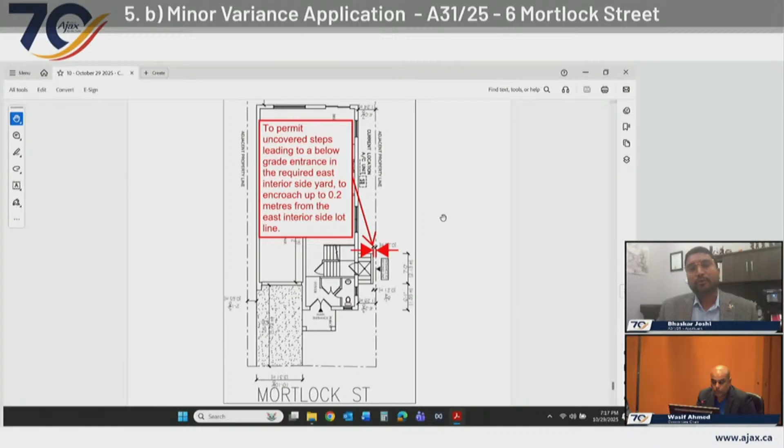The current condition of the basement is unfinished, and after getting these minor variances, we will be ready to put the permit for the rental apartment. That will create a new rental apartment in the basement.

Thank you. Okay, perfect. Before I look to committee to see if there's any questions for Mr. Joshi, can I just confirm with town staff whether notice was served on this application and whether any correspondence was received? Mr. Chair, notice was served and no correspondence was received.

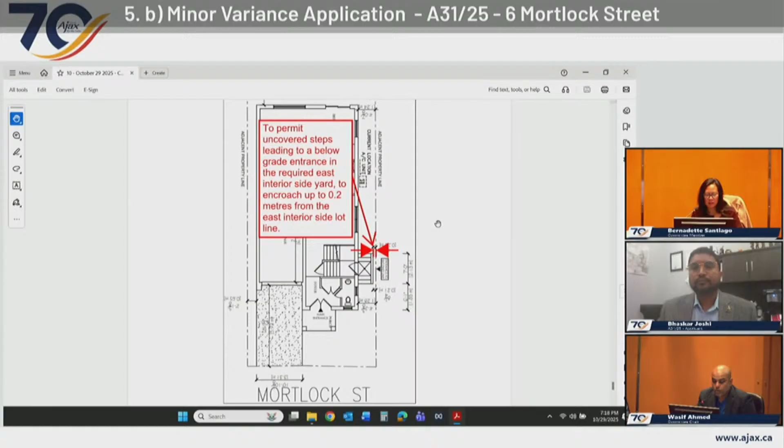Bernadette, through you Mr. Chair, perhaps I can hear from the applicant how you will ensure proper storm water drainage around the below grade entrance to prevent pooling and water infiltration, considering you're quite close to your neighbor, and just want to make sure that's taken into account as you work your plans out.

Sure, through chair, I can answer that. There is a 0.2 meter setback still there. However, this new below grade entrance will be 6 inches higher than the grading, which will stop the water from going inside the below grade entrance, and the water can drain on the side of the below grade entrance.

Okay, you're okay Bert? Ken? Through you, Mr. Chair, is it intended that there will be a light above the door at the side entrance, and is there a plan for snow removal?

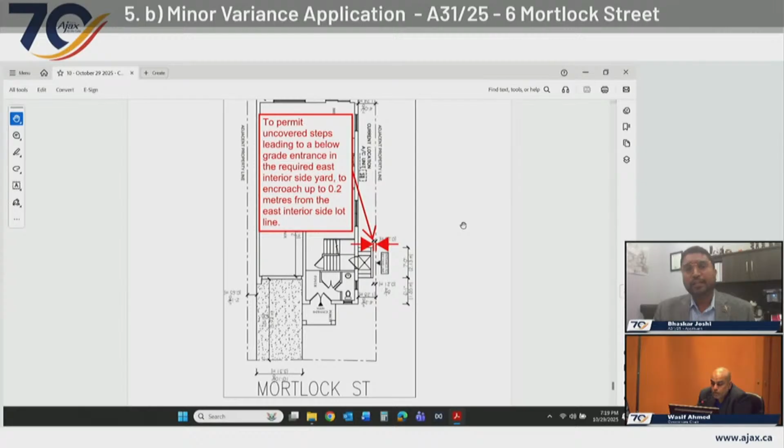Yes, as per the building code requirement, when we propose a new side door, it has to have a new light, which could be turned on and off by a light switch or sensor, but it has to have a light when there's a new side door proposed. For snow removal, it will be the same as a homeowner removing snow on a side yard, because it's accessible on both sides, and it's only 3 steps down.

Okay. Ken, you had a follow-up? I did, through you Mr. Chair. Will the light have some kind of reflector on it so that it does not cast a shadow on the neighbor's property, which has windows in the side yard?

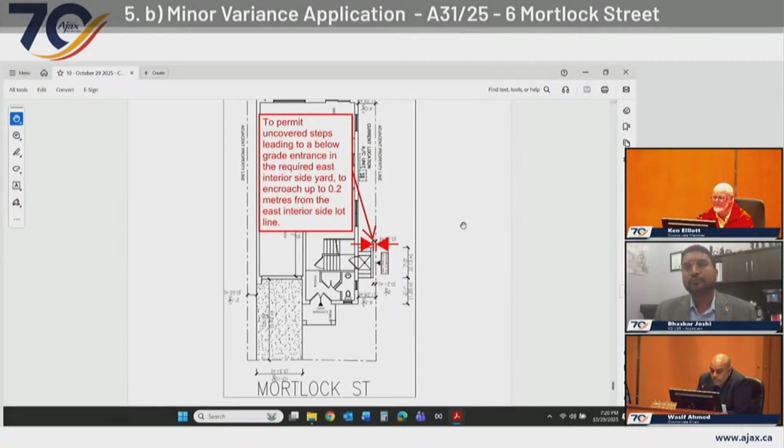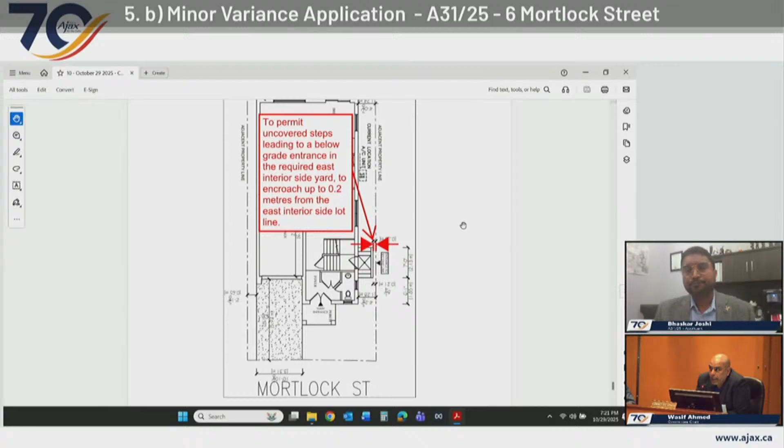If you put a note, then we can enhance this requirement. Generally, building code doesn't require it, but if we put a note, then we will make sure we put a light that only shines down, not to the side. Yeah, that's exactly what we're looking for, Mr. Joshi. If you could take that note yourself and pass it along to the owner, that light should have some mechanism for it to point downward, as the neighboring property does have a window there on the side. Sure, I can put that note also on the drawing when I prepare for the building permit.

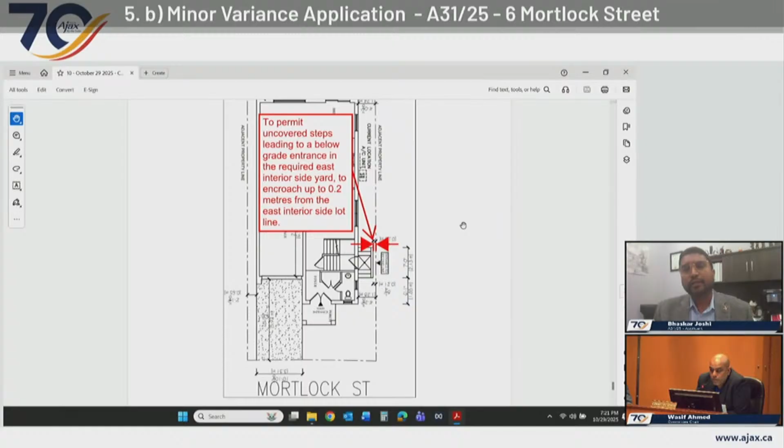Great idea, thank you. Any other questions from committee? Bernadette? Just one more, through you Mr. Chair. Could the agent confirm that the pedestrian pathways to and from the steps in the rear yard will remain unobstructed by landscaping or whatever it may be? I understand that utilities will need to be moved. I just want to make sure there's easy access to and from the rear yard.

Yes, as per my knowledge, there is no utility attached in this area which needs to be removed, and we are okay with that. No utility coming through this area is on the other side, and let me understand if I have your question correctly. Going through and coming back, as there are only 3 steps, it's easily accessible. Or can you repeat your question so I can explain it better?

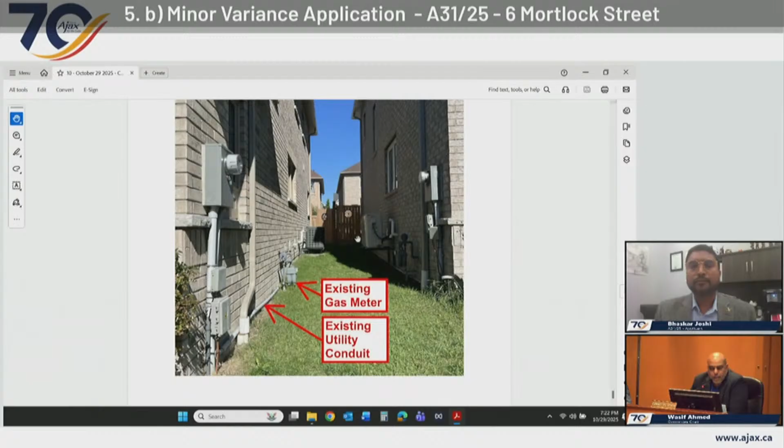Yeah, if I may, town staff, can you just put figure 3 up, next page? So, Mr. Joshi, if you can see the screen share, this is where committee member Santiago is talking about the access, right? These were also read at the beginning of the application portion. There is a condition formally in the report asking for these to be moved.

Okay, sorry, I mixed up 2 properties. So the homeowner knows about it and is ready and willing to move this gas utility on the front side, onto the other side, the west side. And to my colleague's question, it is also a condition, I think condition number 3, that there will be a pedestrian path accessible all the way to the backyard. Yes, that will be, yes, because that's why we're making steps on both sides, going down and then bringing it up to the backyard.

Okay, all right. Any other questions from committee members?

All right, thank you, Mr. Joshi. I'd now like to check to see whether there's anybody here to speak either for or against this application. We're again on application A3125 for 6 Mortlock Street. Anybody in person? Anybody online? No? All right.

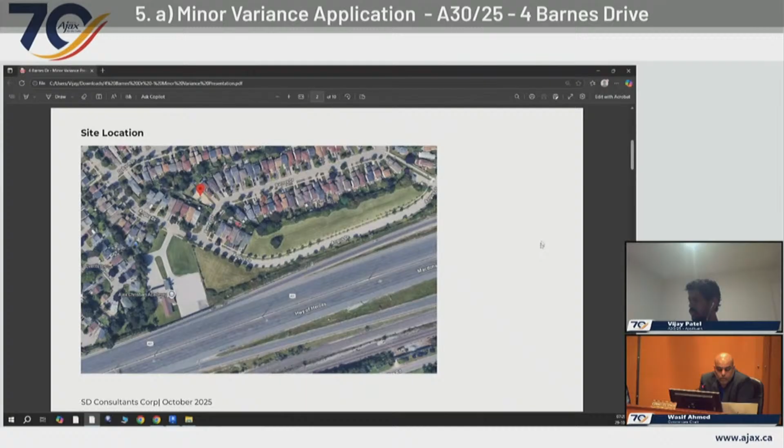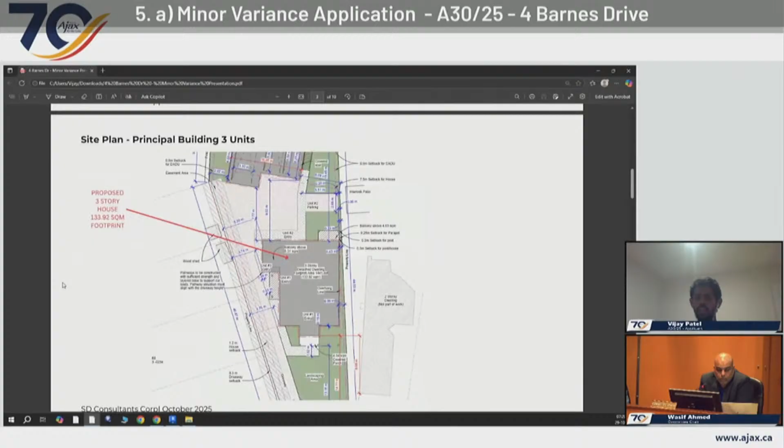This plan shows the proposed building, a 3-story house with 3 residential units. The footprint measures around 134 square meters. As we prepared the layouts, our aim was to create homes large enough for families compared to small apartment style units.

In addition, we proposed an accessory dwelling unit above the 3-car garage, providing 1 additional unit. This ADU has a 77 square meter footprint. In total, the property will accommodate 4 units. Each unit is designed as a 2 or 3 bedroom home, and each unit has its own parking space.

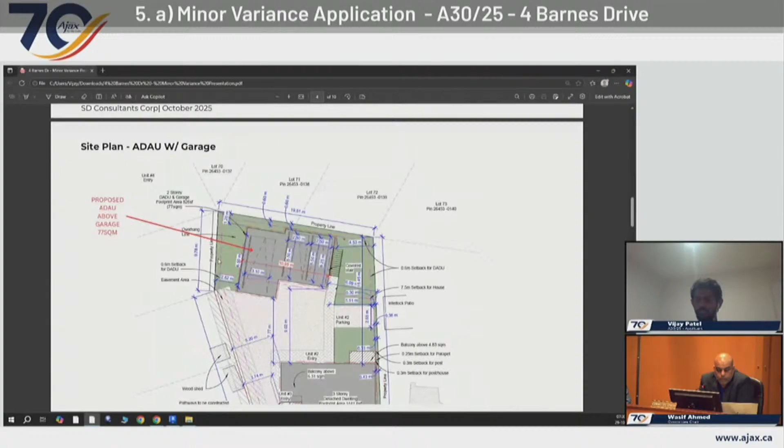This elevation shows the secondary structure on the ground floor. We are providing 3 parking spots for cars, and on the first floor we have planned unit 4. This creates efficient use of space while minimizing the building footprint.

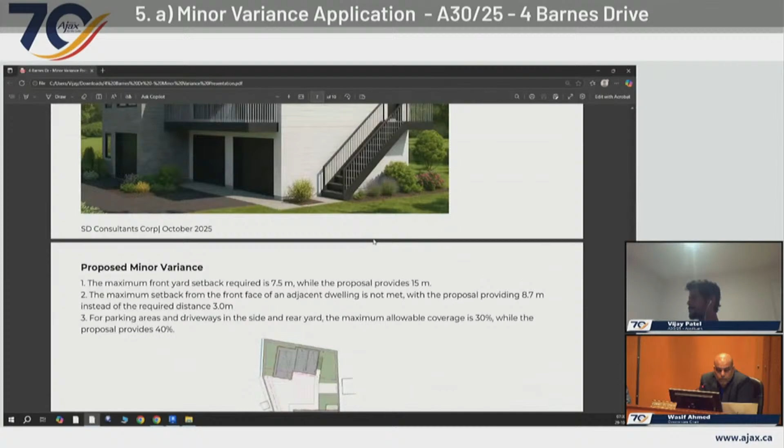Can you just go up, sorry, Mr. Patel? Yeah, can you just go up one more slide? Yeah, up one more, just wanted to see the full building as well.

Just before you go on, so just to confirm, the building itself plus the garage with the unit above it will all be a flat roof, correct? That's what I'm seeing in the pictures. Yes. Okay, all right, thank you. Please continue.

Yeah, so we are seeking approval for the following variances. Front yard setback required is 7.5 meters and we are proposing 15 meters. Second, setback from the adjacent dwelling required is 3 meters and we are proposing 8.7 meters. Third, parking area or driveway coverage allowed is 30% and we are proposing 40%.

These adjustments result from the unique lot configuration rather than overdevelopment. To help visualize this, I have included the lot plan to demonstrate how the lot shape has influenced these variances. The site is a pie-shaped lot with a narrow frontage, creating a challenge in meeting all setback requirements while still providing sufficient driveway width.

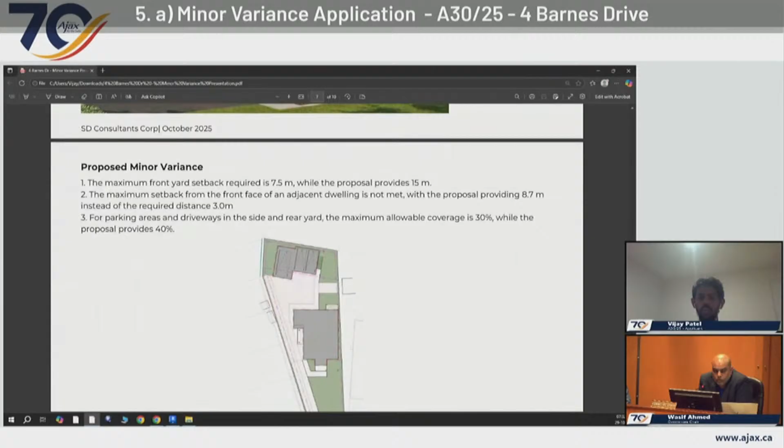Because the house is pushed further back, the rear yard landscaping area is reduced. However, overall the property still provides good green space.

We are also requesting approval for the following variances. Garage width allowed is 3.3 meters and we are proposing 11 meters. Garage or ADU area allowed is 60 square meters and we are proposing 83 square meters. Parking space dimensions required are 2.5 by 6.5 meters and we are providing 2.5 by 5.5 meters.

The intent of the wider garage is to provide covered parking space for 3 cars. If we were to place the ADU at grade, it would consume more lot space and reduce the available green space. By building the ADU above the garage, we minimize the footprint impact and preserve the landscaping.

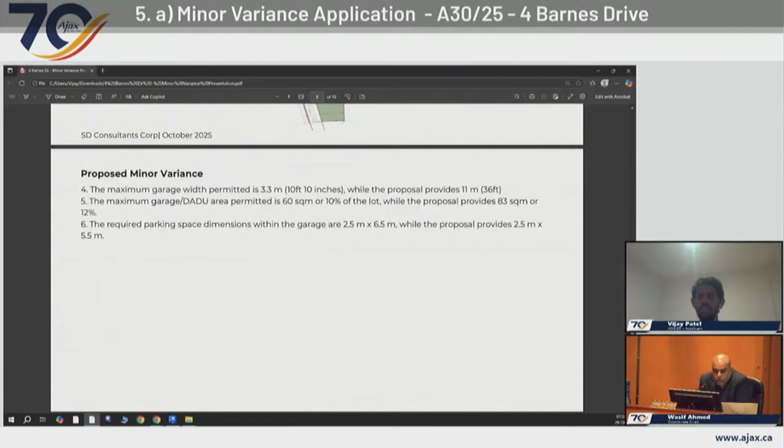Regarding garage width, the zoning allows only 10 feet, which is wide enough for only a single car, making it impracticable to meet in this case. For parking stall length, although we propose 5.5 meters instead of 6.5 meters, this still accommodates standard vehicle safety and efficiency.

We would like to address neighbors' concerns. First is privacy. We understand the concern about privacy. Our design does not add any new windows on the side facing the neighbor. The balcony is similar in impact to the existing 2-story homes in the neighborhood, which already have backyard windows.

Another issue is drainage. Drainage is a valid concern, and we will be submitting engineering drawings to the city to confirm that all water is managed on the property on site and will not run off onto the neighbor's property.

Third is parking. We have heard the concern about street parking. Our proposal provides the required number of parking spaces for each unit as per the zoning bylaw, so no additional pressure will be placed on the street parking.

Last is noise and construction. Construction can be very disruptive, and we recognize that our client will follow all the city's regulations for construction timing and noise, taking steps to minimize the impact on neighbors. In addition, the client is planning to use modular, factory-assembled building. This approach not only reduces the duration of on-site construction but also significantly lowers the impact on surrounding neighborhoods by minimizing noise and shortening the timeline.

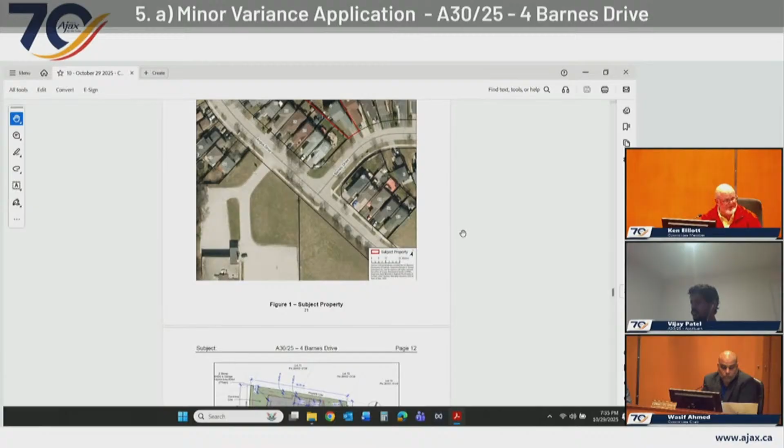Through you, Mr. Chair, I wonder if they could put up Figure 2 site plan. Yeah, make it a little bigger. I guess we're sharing his screen, right? No, this is our screen. Okay, yeah, can we zoom in near the top?

So for the main building on the left side, it looks like there is a label that says Unit 1 entry, and it's to the south, and then there's Unit 1 entry to the left. Is that actually a balcony? I see the balcony for Unit 2, but is that where the balcony is for Unit 3? And is there a second entrance? Just looking for the label.

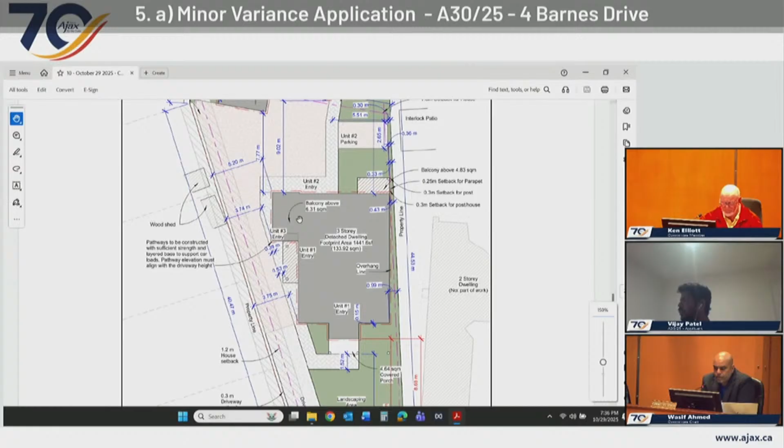So Unit 2 has two balconies, one on the left side and one on the rear side. Unit 3 has one balcony on the rear side only. Through the chair, Ken, the balcony you've asked about is where my cursor is pointing to right now. Okay, yeah, thank you.

Any other questions from the committee? Amanda?

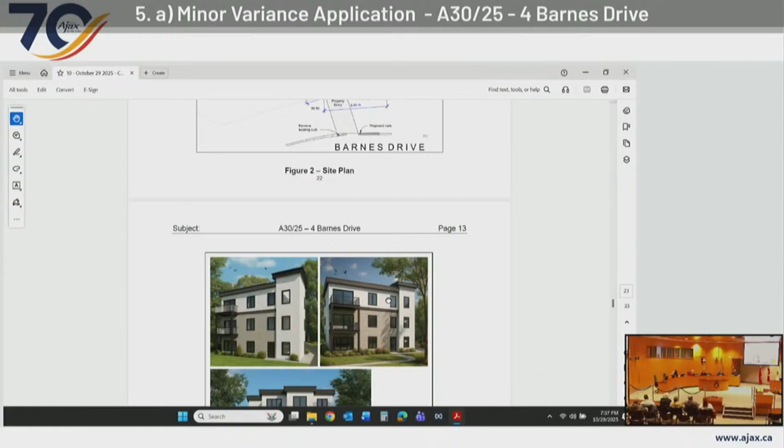The garage in the rear has 3 parking spaces within it. Will they be fully enclosed individually per parking space within the garage, or would they be open within the garage? So we would like to keep it open because it's easy to open the doors, and also if we separate them we have to provide fire ratings between each parking spot, which reduces more space due to wall thickness and stuff. So we'd like to keep that open.

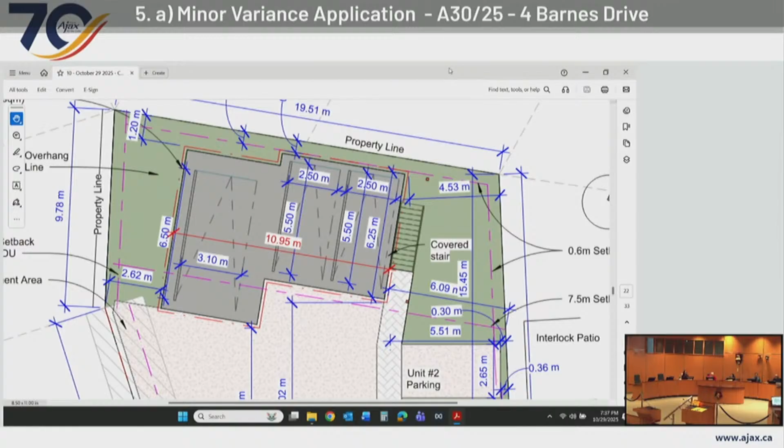Okay, any other questions from committee?

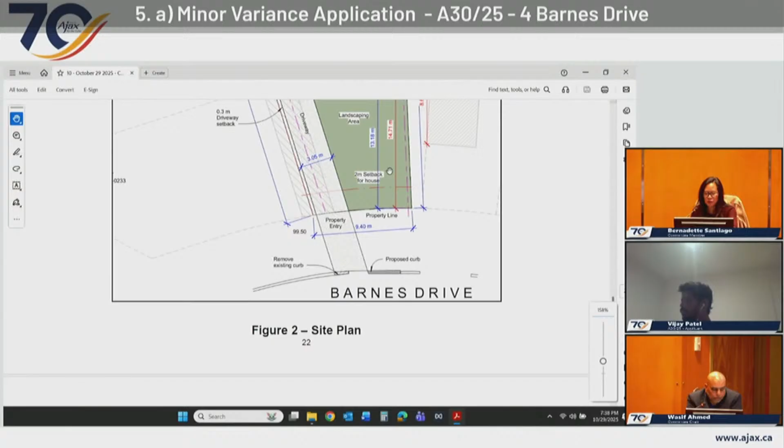Through you, Mr. Chair, perhaps the applicants can speak to what, if any, architectural treatments or designs are being contemplated for the accessory building, to ensure there's a level of compatibility with the principal triplex as well as the surrounding neighborhood. I can appreciate that this structure, as noted in the diagrams in our package, looks very different from your neighbors. I'd like to hear from the applicant what considerations are being made for the respectfulness of the neighborhood and in keeping with those that surround this particular property.

Yeah, definitely we considered that when we started, and we saw that all the buildings around are 2-story. To provide a 3-story building, we have to use a flat roof; otherwise we would love to use a gable roof, but then we can't meet the overall height restriction. That's for the house. For the garage dwelling, we are almost meeting all the zoning bylaws — there's 3 or 4 zoning bylaws we are not meeting, basically due to the pie shape lot. We are also using natural stone veneer up to eye level and separating the 3rd floor so it doesn't look like a huge building from the street.

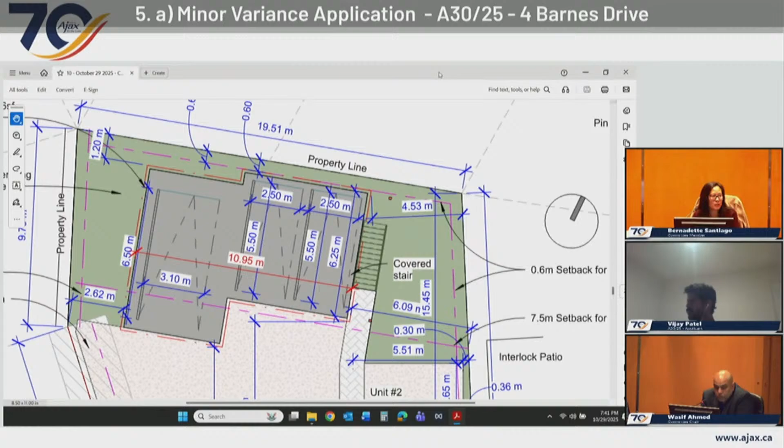And so if we could speak to the separate entrance, the parking allocation, which I know is noted in the report, as well as the waste collection. You could appreciate there could be X amount of people living on top of that garage. When you populate an area, people are going to be using the facilities, such as they will have visitors, they will have X amount of garbage, et cetera. I'd like to hear from the applicant if he could speak to that.

For the garbage, I feel that we have sufficient extra space on the garage, so we can provide some space for the garbage. And for the temporary parking, they can definitely park on the driveway, or they can use public transportation. But that's our plan, and every unit has its own parking, so hopefully that's not a problem.

Yeah, so we will make sure during the building permit application we provide the engineering drawings for the grading. And if required, we can provide a small retaining wall between our property line and the neighbor's property line. So it's definitely going to conform to that before the building permit is issued, basically.

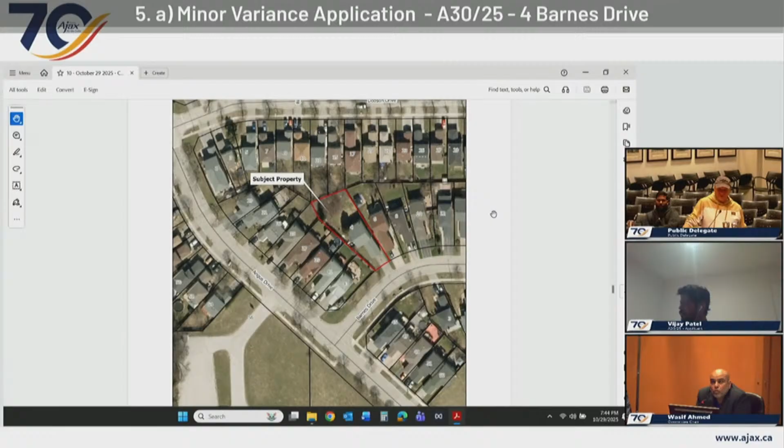And I'll start with your name. Wayne Fulcher. Okay, and I'm one of the neighbors adjacent to that property. I've been a resident of this subdivision since it was built, which was 30 years ago. It's a single-family subdivision. Most of the lots are 35 by 100-foot lots.

So it's surprising to me that we're sitting here in council looking at a fourplex going in on a single-family lot. Having said that, I understand there is, I guess, room for some because it is a fairly large lot, but the applicant has made this so that four family dwellings are on a single lot in our neighborhood.

So my biggest concern, I guess, is how this even got approved, first of all, but after that, the biggest concern is even parking. We're looking at a regular-sized lot in a small subdivision here. Most people have at least one car, quite often families have two. Never mind snow removal, four cars - I'm not even sure about the garage size, because it must be fairly small. I don't even think somebody would have a pickup truck that could get into that garage.

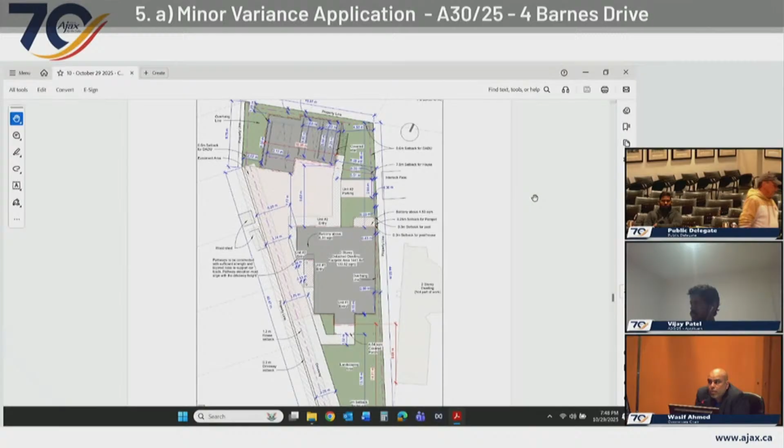Okay, maybe I'll, if it's okay with the committee, I'll touch on a couple of points, Wayne. One was in terms of parking. So there are, to your point, and as we all saw from the drawings, there are 4 units, there are 4 parking spots. So there's 3 in the covered and 1 in the open to the far right that you see, that's shaded near the middle of the property. That is the town's bylaw.

The other thing, one of the things that we as committee members, and keep me honest here, guys, is we see applications all the time for condos, for building residences, whether it be low-rise, whatever, and they will normally allocate only 1 parking spot to an apartment which has square footage of nearly 900 to 1,000 square feet.

I hear you in terms of your comment. I'm in the same boat as you were suggesting. Say I have a single dwelling house near Westney and Rossland, and I have 2 cars. So if I was buying or interested in buying a property or moving into this property as a renter or buyer, whatever the case may be, I personally would kind of not consider this one. I would scratch this off my list. So normally, and I know you made the comment about the pickup truck, if I had a pickup truck, I probably wouldn't be going in here.

Right, so normally people will, and this has been a conversation that we've had as committee members with condo developers as well, to say, well, you're only going to allocate 1 parking spot, but that's what the bylaw says, that it needs 1 parking spot per dwelling. In terms of if I was going to have a ton of visitors, my visitors can't, and if they're going to stay overnight, they can't park on the street.

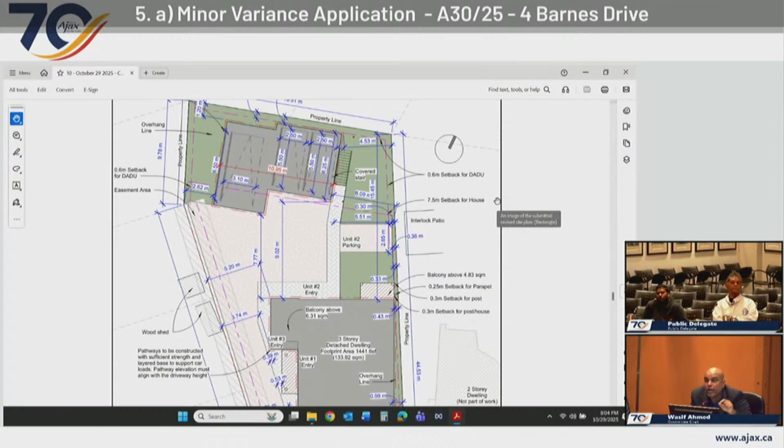But it was the same scenario, right? There was new construction happening, and it was kicking stuff onto my property. But there's nobody for me to go knock on their door and say, hey, you're going to have to pay for my car washes for the next 6 months while you're doing this. It's just not going to happen.

Did you laugh when you saw that comment? I smirked, yeah, I'm being honest. Yeah, only because I could relate.

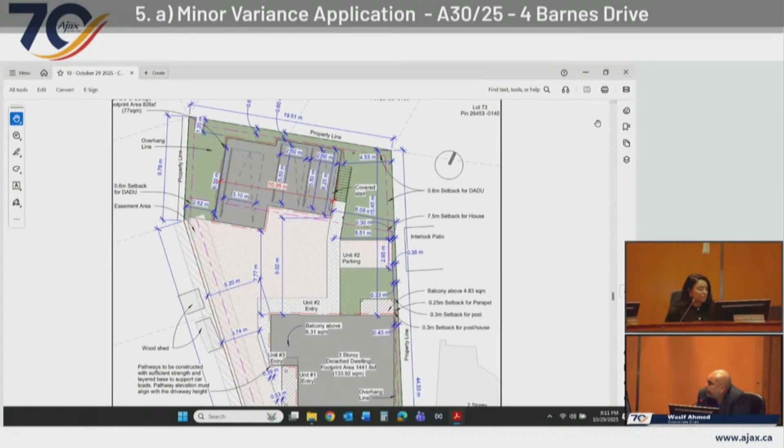Amanda? Through the chair, is it possible to ask some questions of the applicant based on the conversation we've been hearing? I would say yes, absolutely. Mr. Patel, you're still there? Yeah. Okay, Amanda, go ahead.

Thank you. Could you confirm to us one of the parking spaces in the garage will have a depth of 6.5? It appears that way. Two of the spaces in the garage would have reduced depths, but one of them will have a depth of 6.5. Is that correct? Yes, that is correct.

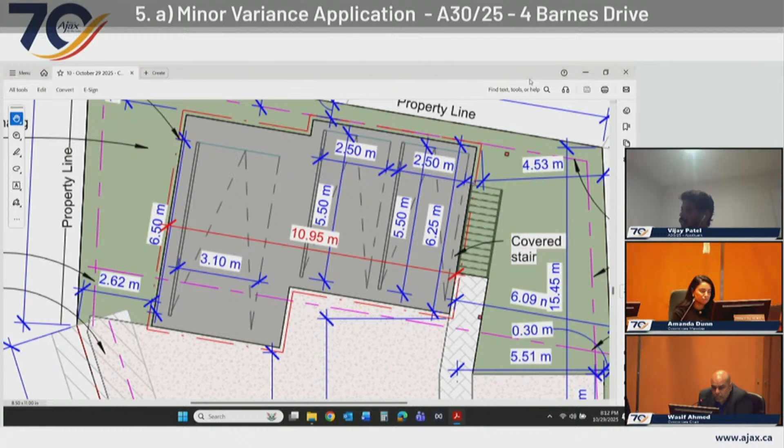I have two more questions for you. In the garage, has there been any consideration for space for garbage, recycling, bicycle, any type of storage for these units as well? We will see if we can fit the garbage on the 6.5 meter side. We would like to fit some garbage, but not any kind of storage or anything else.

Okay, one more question. Has there been any traffic safety consideration? The driveway looks to be a width that would allow for one lane of vehicles. Has there been any consideration for the different units coming in and out into the parking space in the rear, that there would be any traffic safety concerns?

Yeah, it is definitely hard to get a wider driveway. We would definitely like two cars to go and come out, but as we see in the lot, it's very hard to get a wider lot, a wider driveway basically. If we do that, the house has to go further back, and then we have more setback issues. We've gone back and forth 6 or 7 times with the city transportation department to make sure we have sufficient setbacks between the house and the garage. Right now we have 9.02 meters between the garage and the house, so the car can come and go back very easily.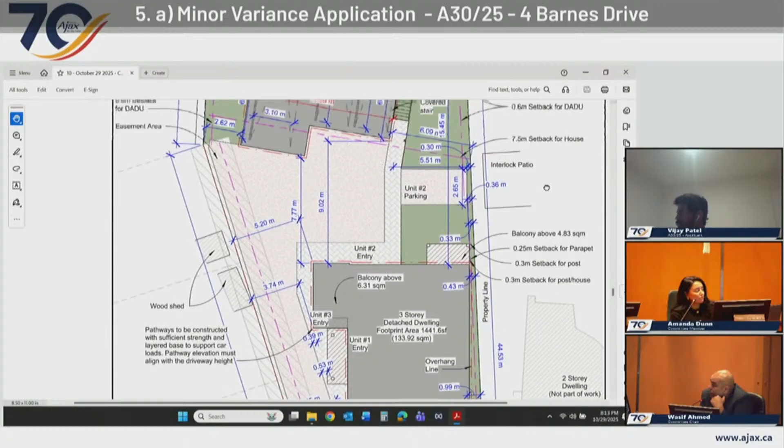Through the chair to staff, Transportation Services has reviewed this and has no concerns. Through the chair, that's correct. There was some shifting of the building originally, so that there could still be auto-turn to show that vehicles could reverse out of the garage and maneuver.

Okay, Ken? Through you, Mr. Chair, to the agent, is there going to be a basement underneath the primary building? None of the building has a basement. No, none of the units will have a basement. None of the building structures, I should say.

Bernadette? Through you, Mr. Chair, perhaps this is to staff. I know Transportation Services has taken a look at this and they have no comments to share, but perhaps you can educate me if this is not something done at this stage. In terms of traffic or on-street parking impacts, has that been assessed given the increased number of units and the reduced on-site parking space dimensions? Is that something contemplated at this stage, or perhaps at the building permit stage?

Through the chair, it's been considered already at this stage. Like Chair Ahmed mentioned, the parking requirements are being met. Those are as-of-right permissions. And I do want to point out that this scenario is a lot better than someone taking an existing single detached dwelling and making it into 4 units, which is permitted.

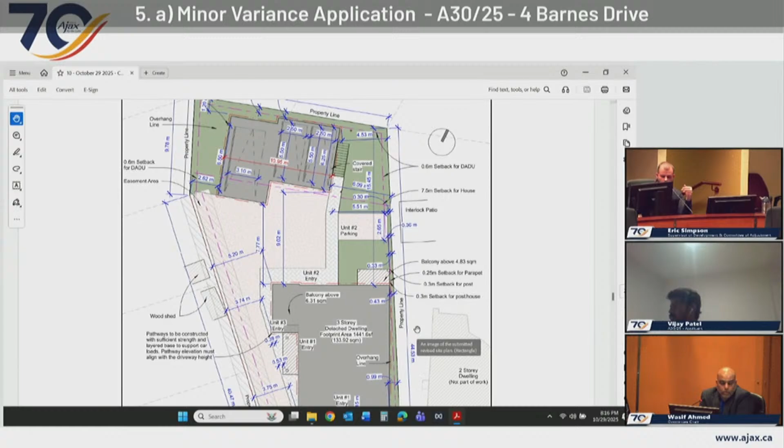So yes, there will be cars parking on the street. That's a given in any neighborhood. But I think the ability here with the extra driveway, the extra parking space between the garage and the building, you could even have vehicles in short-term parking in that area.

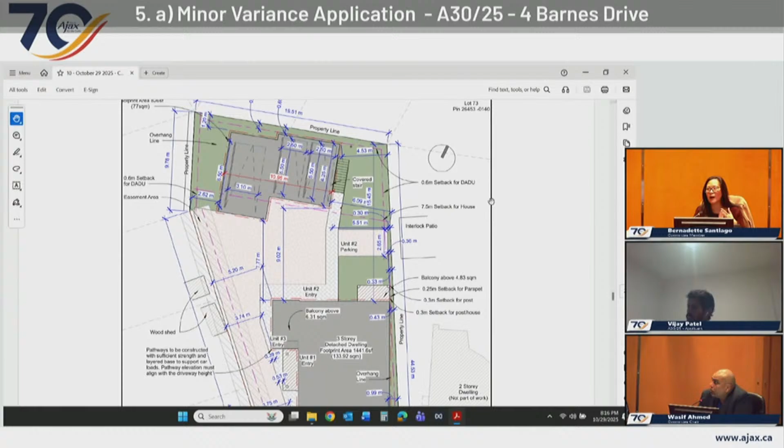Through you, Mr. Chair, thank you staff for those comments. I think my initial question was really for the purposes of our audience, to make sure that we as a committee, as well as the folks who created the staff report, have contemplated this, so that all the agencies and departments that need eyes on this have actually put their minds to what this means for the potential of this neighborhood. So I thank you for your comments.

Good point, thank you. Hi, good evening.

I just have one last question. Sure, I'll start with your name though. It's Linda, at 43 Angus. Is there going to be a plan to do all of the fencing all the way around?

I would think so, but I don't know what exists there today, so I'll look to town staff for that. Through the chair, sorry, by fencing, you mean construction fencing, like during construction? No, I mean when it's all done, because at least 3 or 4 of us need to redo our fencing at the back within the next future.

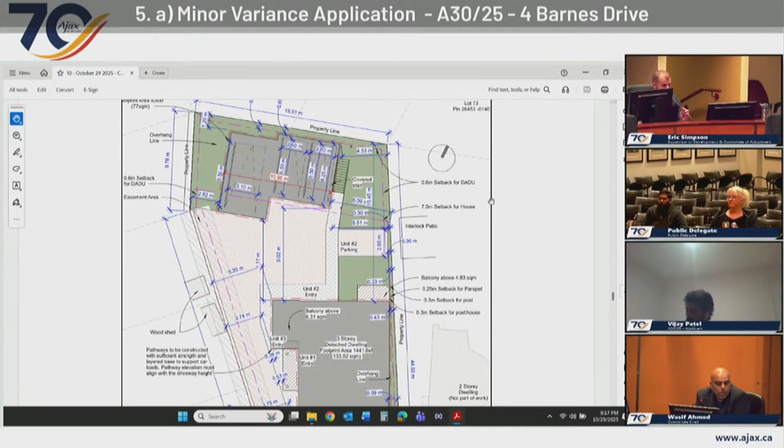Understood, so it's joined, it's right on the property line. Okay, so I'm asking if they have a position to fix the fencing all the way around. That would be entirely up to the owner of the property. That's not something we're looking at specifically in this case, because this isn't something that goes through site plan control. It's a freehold property, it just goes through a building permit. We don't have an obligation to say you must fix that fence, so it would be up to the owner.

Yeah, it's a good question though. Yeah.

All right, is there anybody else that's here to speak either for or against the application? If we make it quick, yep.

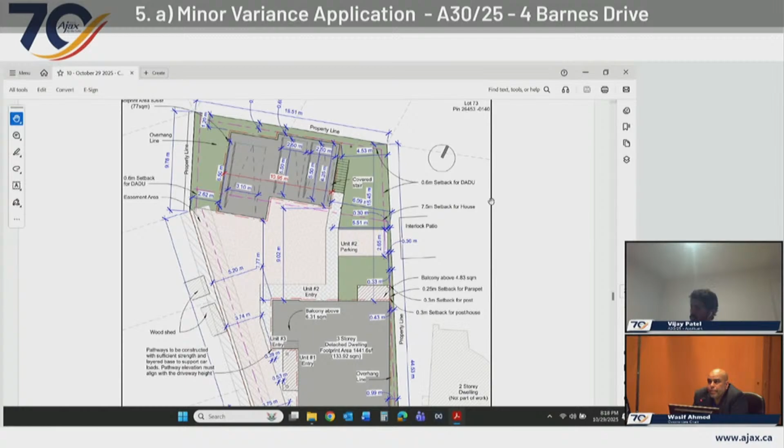Do I understand that part of this committee now is approving that the main building is being set back far enough for this building to be constructed? Yes, can we pull up page one of the application? It has to be set back in order for that driveway to give enough room to make a parking spot at the back of the property.

Through the chair, no, I can clarify that. Certain zones, this being one of those zones, has a minimum and a maximum front yard setback. In this case, this zone has a maximum, so it's saying buildings should be closer to the street, they can only be so far. In this case, with the pie-shaped lot and the type of building they want to design, they can't put it closer unless they do that projecting garage that all the other homes you see have. So because they're not doing that style, they're pushing the house further back. That's why they need a variance.

Okay, so this committee is approving that variance to move that property back? They're approving it, if they approve it, a design that would push the building back and not meet that setback, in order to create that parking spot at the back, correct? For the most part, it has to do with that configuration.

All right, so in order, this building is being set back in order to create that driveway along that fence line or property line to be able to access the parking at the back. And then again, all the things involved with snow removal, everything that comes with it, this property is being set back, and this committee has to change the bylaw in order to put that building back, in order to put that driveway in there. So they have to approve that so that driveway accesses a parking lot basically at the back of the property, because the property is a pie-shaped lot.

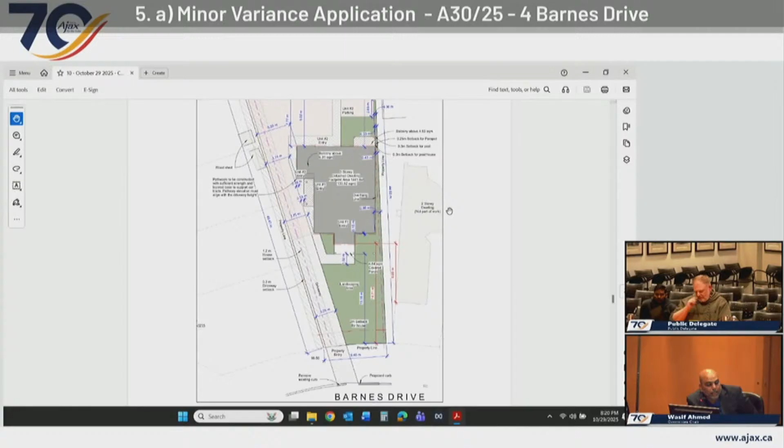So they have no concern about getting back there with all the cars that might be in that back lot? Through the chair, they would not have to ever take their fire truck down the driveway - they would pull up in front of the house. I get that, but if there's a bunch of cars in that laneway, they've got to try to get all those hoses down there. That's what I'm looking at. It's set further back from the road, whereas all the other houses are closer, right? So when you're fighting a fire, you don't want to have to run all the way to the back of that building. But if it's set back that way, that's what they would do.